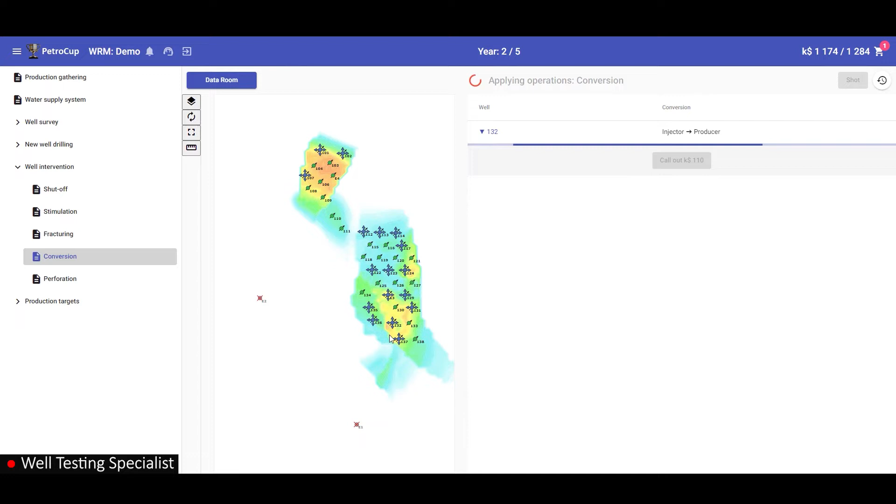132nd well, we shut off to 16-20 meters. I propose to drill wells in the south to the left of 137. It is necessary to place the well at the highest point on the structure and target the most reserves below. Geologist, do you want to drill in the northern part of the west? There should probably be a good amount of reserves in the northern part. I would like to get this information on where the reservoirs are highest.

Can you clarify? What other options are there? To the left of well 137, or where you mark the reserves, in the area around well 108, there will be more reserves in the area around well 108. Besides, if we explore them, it will be easier to maintain pressure. There could be two layers with residual reserves.

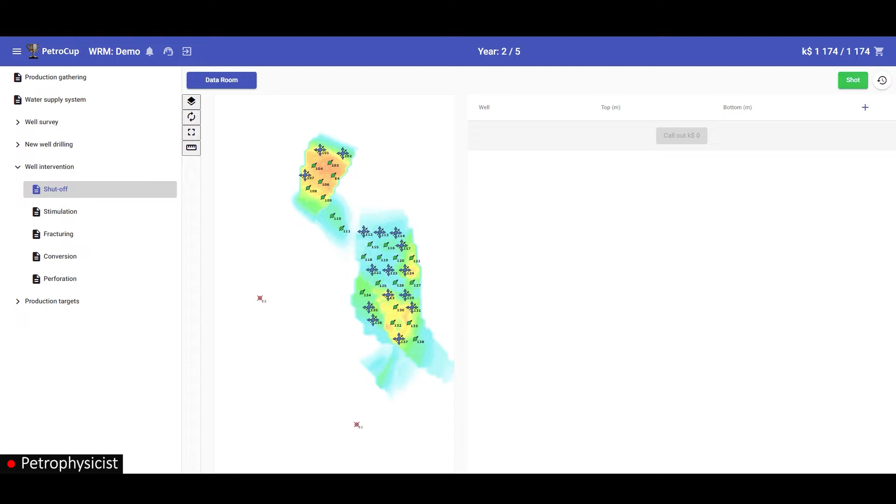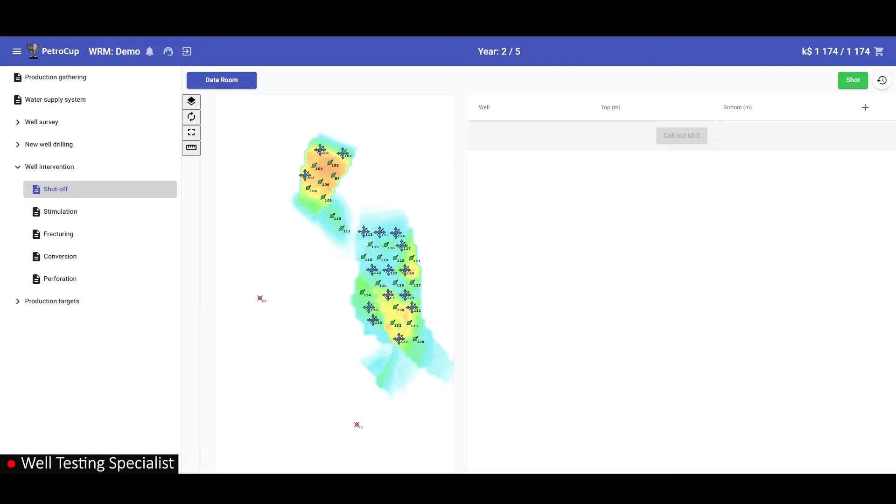Can we drill a new well and save $27 thousand for workovers? I support the idea proposed by the well testing specialist. We need to drill a well on the northern dome. The bottom hole pressure at well 109 is now 61 bars. Well 108 has been shut in again due to water cut. Therefore, it is possible to drill a vertical producer below wells 108 and 109. If it turns out to be a good producer, then next year we will convert it to injection and drill a horizontal well on the northern dome, if the budget allows.

I support this decision. And the remaining $27 thousand will be used for workovers. On the southern dome, we should only work over the most promising oil producers. Shouldn't we pay attention to maintaining reservoir pressure? This means conversions and tracking issues with channeling. We will have $27 thousand allocated for all the activities. Nonetheless, let's check the pressure, how effectively we have raised it through activities so far. What do you say?

We can measure the pressure in well 109 first, if we plan to drill a vertical well around those wells. Let's measure the reservoir pressure. Can you please state the well numbers? I have a question to the simulation engineer. I have a previous list of wells. Will we survey them all or selectively? During the second shot, do we have to set the production targets for all wells, or perhaps the information is clear for certain wells? I believe we shouldn't do it for all wells.

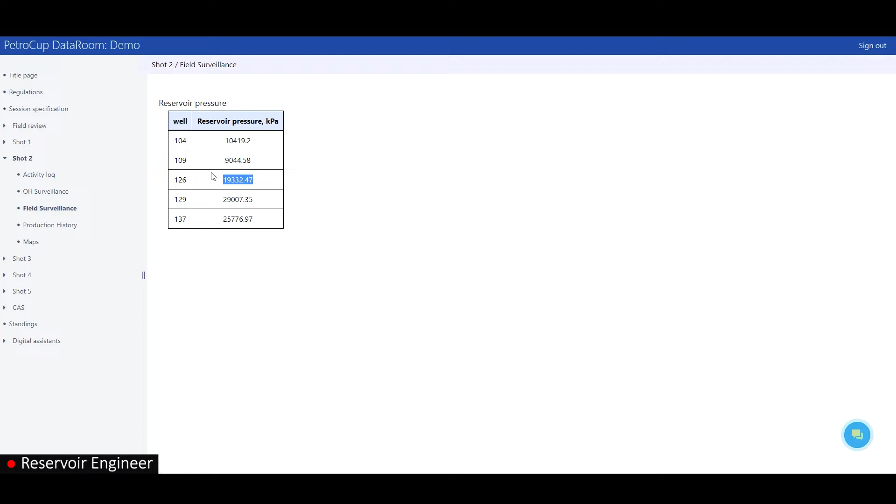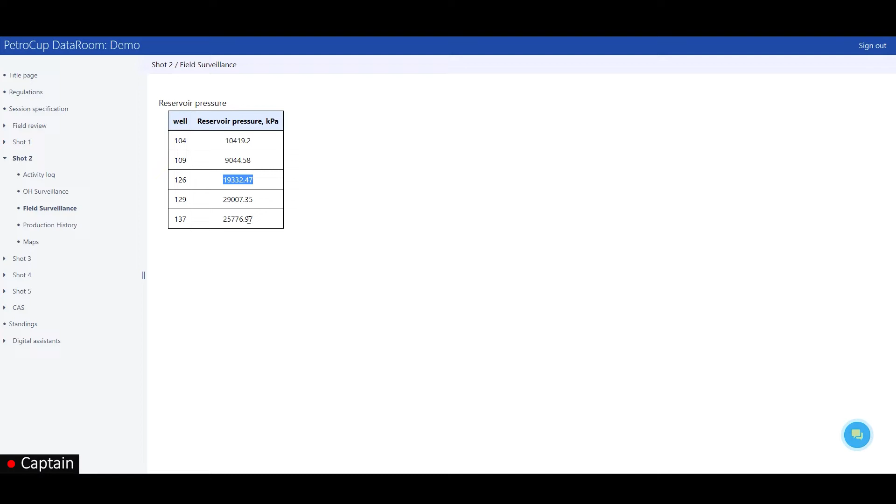In case of well 137, we shut off reservoir B1, and for well 129 too, which may imply that we are injecting too much. We can see this from the producer 126. Now we have started to inject a huge volume of water. The question is, is it worth stimulating this volume in offset wells?

We have previously over-injected into unit B11. Now we have removed the injection from there. Let's stimulate it, which is also not a bad thing. But maybe we would shut off the unit B11 altogether. Perhaps we should consider doing it later.

The last 3 wells, 126, 129 and 137, are located in the south. This is the target unit B2. And in the north, where we have not tackled yet, we have a problem with the formation pressure. Yes, we need to restore it. That's right. Can we convert well 108 to injection?

There, it is necessary to work on both well 107 and 108. And, if I am not mistaken, with 103 and 104 as well. For some reason, there is poor production and injection as well. If we convert well 108 to injection, it will help maintain the pressure at well 109 and any upcoming new wells. At well 108, it is necessary to perform water shutoffs.

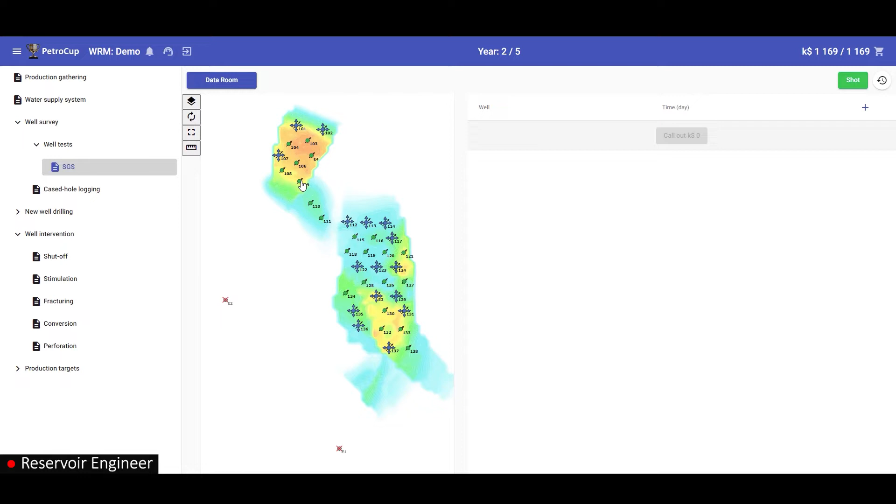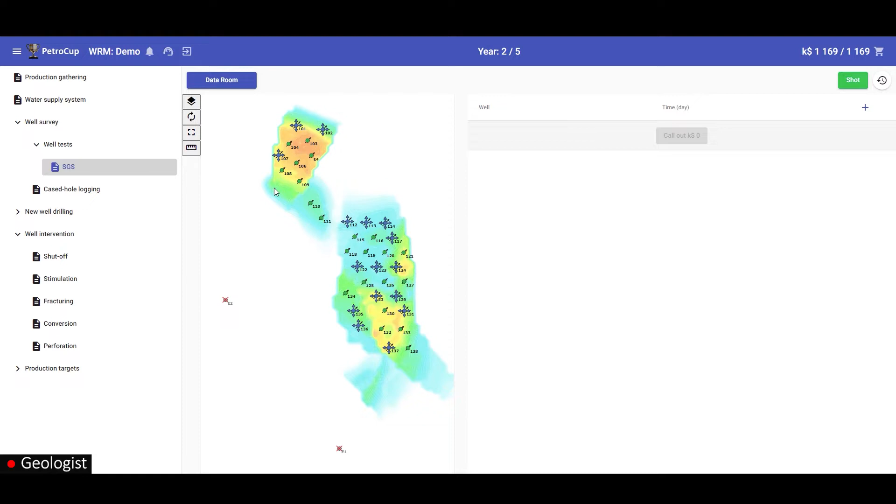Do we have a common agreement regarding drilling locations? Between 108 and 109 in the form of a triangle. I also support this point of view. If we are going to further convert it to pressure maintenance, then it's probably fine. At well 108, we probably need to shut off some water or gas zones and convert it to pressure maintenance to allow us to produce more from both well 109 and the new well.

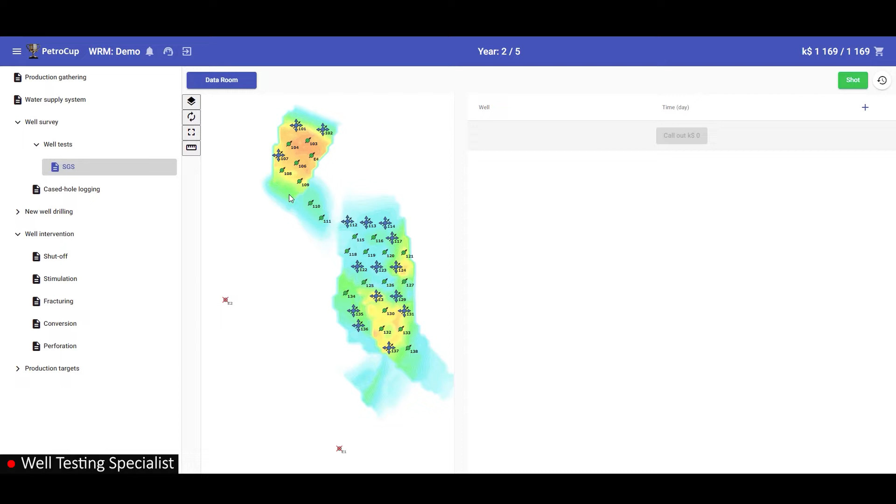Team Captain, what do you say? Please repeat it again. We're going to convert well 108 to pressure maintenance and perform water or gas shutoff on it. We will drill a new producer between wells 108 and 109 below. But first, get enough money, and on the next shot, if there are enough funds left, we will drill the formation below the zone proposed by the geologist, and then convert the new well to pressure maintenance. I think it is a good plan.

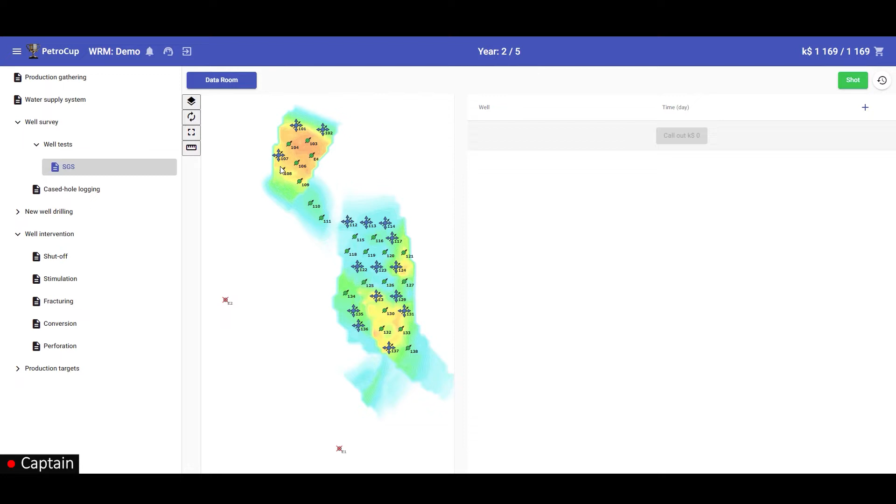Aren't we going to do anything with well 107? It hasn't been optimized yet, as far as I remember. We made a reservoir flow profile there. We are currently discussing drilling. There will not be enough pressure, so we need to see what to do next with wells 107 and 108. So we will apply remedial jobs to well 107, as we did with well 108.

All right, colleagues. Let's choose a data point. Which coordinates will be more preferable? Slightly to the left and above where the marker is located. Okay, geologist, how deep is the well going to be? Do we need all the reservoir units?

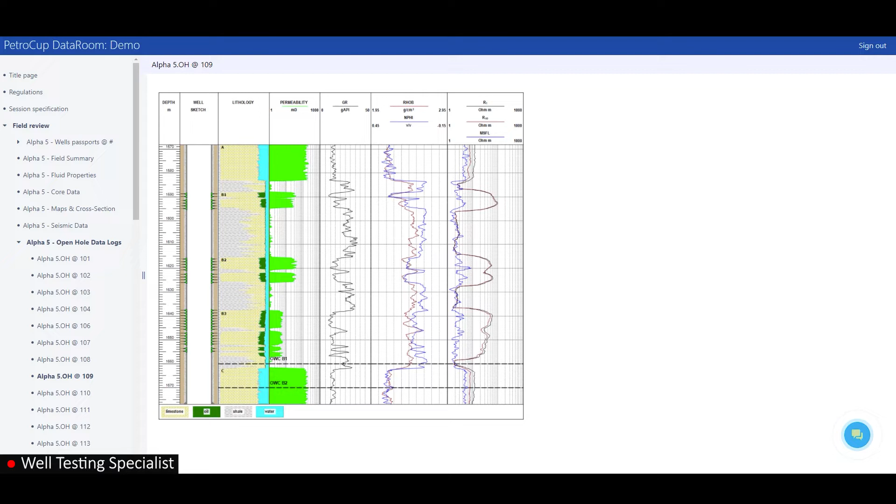We are developing a new zone, and we assume that in the future, the well will be an injector. So I think it's better to enter all 3 layers into the pay zone. We need to look at which reservoir zone is active in well 109. It operates on 3 layers. Then everything should enter the pay zone.

We can do it for 1680. This will cost 41 million. And hydraulic fracturing will cost around 7 million. Will we also perform hydraulic fracturing? Yes, it will have an impact at this field. Not at this field, but at this zone. But in my opinion, it is better to work with the old wells.

Yes, I also have a question. Which information are we going to rely on when drilling there? Based on a new interpretation of the seismic data which was given to us by the geologist, it is possible to question what he said. So let's look again. Petrophysicists, please offer your points.

Please open the seismics. The seismic profile shows that the trap is on line 150, and perhaps the trap is extending to overlying and underlying formations. Geologists, regarding line 109, on what basis will you have a justification? Geologist, we need your opinion about drilling a new well. It turns out that the layer should be located higher on line 150 than it was shown on the map.

Accordingly, for the lower layer, the map may be incorrect because there are no profiles in this area. It is absolutely wrong to drill a well to the left of 108 for the purpose of exploration. We don't need to explore, we need to drill a producer.

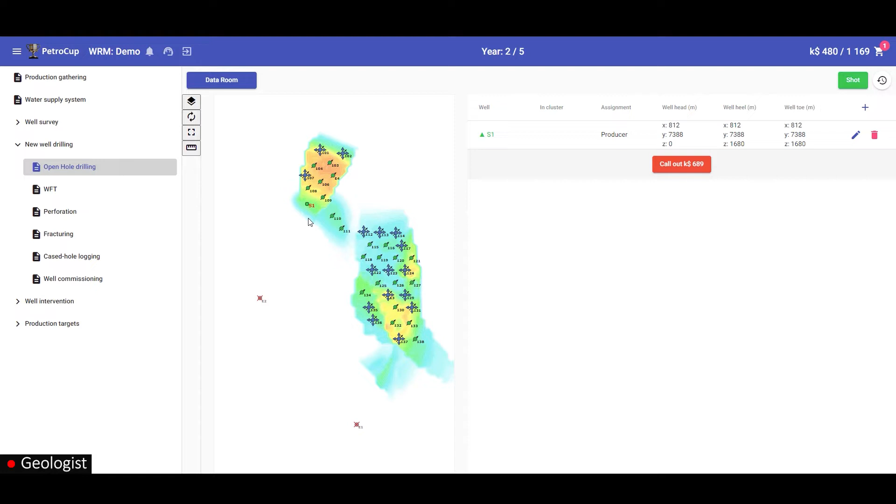There are more chances that there are reserves encountered below wells 108 and 109. Perhaps they will be located higher than this map shows. There are risks there. I didn't get any arguments, but perhaps the geologist is more experienced in this area. According to the current interpretation, there are reserves below 108 and 109. If we drill there, there should be no risks.

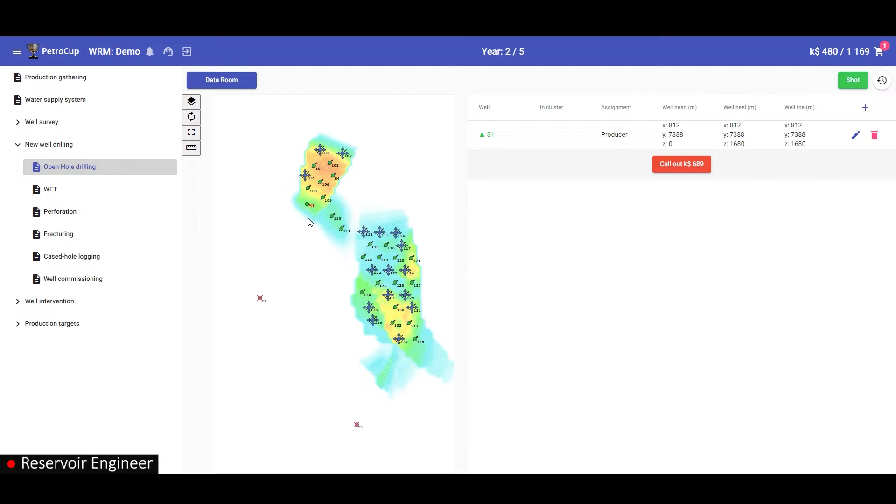As we are drilling now, we will understand what the saturation is and how the slope is descending in this direction. If everything is successful, we will see a good oil saturation and will be able to proceed further. If the saturation is bad, we will get water in a year, and we will convert the well to injection to restore the reservoir pressure. I am fully supporting the petrophysicist.

I will support the geologist because I understand what he wants to say regarding the fact that the interpretation of the markings of the structural map is incorrect, and the reservoir unit lies much higher. How do you know the structural map is wrong? There are no wells here, and you say that here is the flank of the geological structure.

Since there is not enough money, I suggest drilling where we know for sure that there is a trap, and not conducting exploration in order to convert it later to injection. It is true that we will maintain pressure at wells 108 and 109, but in any case do not drill for the purpose of exploration.

Presumably, our interpretation of seismic along line 150 is not correct. Accordingly, the mark to the left of wells 107 and 108 should be higher. There are reserves located below 108, even according to the current maps. So we have decided on the coordinates. We have not decided on whether we are drilling or not.

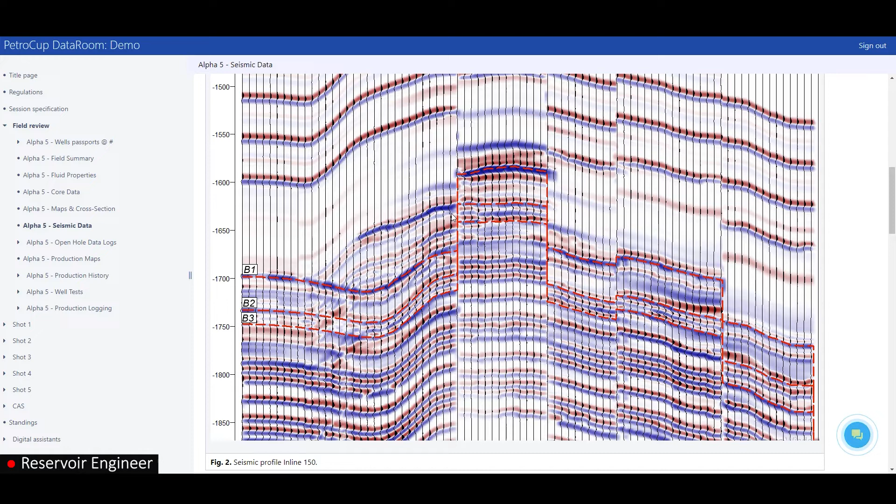Since we are debating, I would like to ask you, in your opinion, how much oil we will get from there? Obviously, there will be a low permeable layer, even at a maximum hydraulic fracturing value of 100 tons. If we apply remedial jobs to wells 103, 104, 109 and 106, we can increase production even higher. I really like this approach. Let's go without drilling. And by maintaining pressure, the oil production will be equalized.

On the northern dome, how many wells need workovers? Will the remaining 26 million be enough? I'm afraid not. We didn't even fix the channeling yet. Currently, we have identified water cut for wells 130, 133 and 134. I believe it was a bad idea to convert well 136. Perhaps we should work with injectors in the north and with producers in the south. And that will be for this shot.

We can increase the volume of the water production, but the question is, how much we will profit from this? We'll probably just receive water. So you want to finish up with the old wells now? I want us to sort things out with the main wells, solve the issues of shutting off the unit B1 in the south, so we will have a stable production. Only when we receive anhydrous oil and when the water cut drops 2 times from the current positions, then we can talk about drilling.

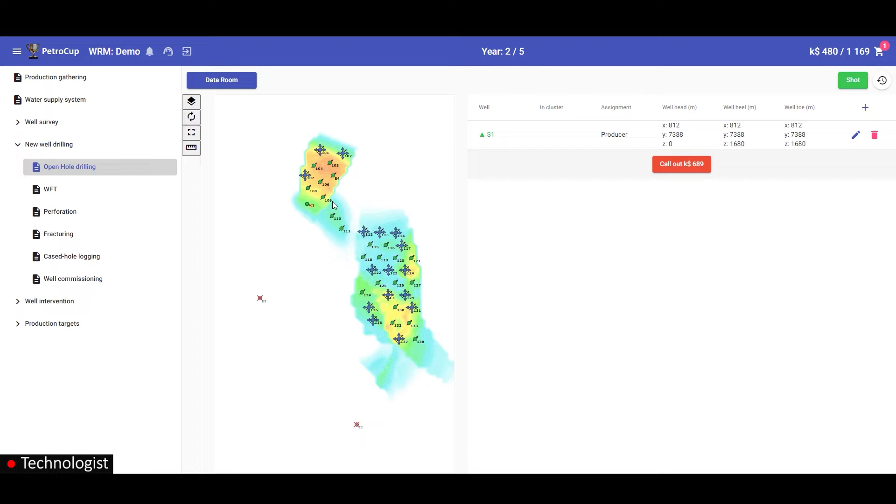But I like the strategy to increase reservoir pressure. We seem to have raised the pressure in the B2 formation to normal. Is it possible to slightly reduce the injection in the south and redirect it to the north? Colleagues, in my opinion, during the presentation there was a conversation that starting from the second shot, we will begin to shut off reservoir B1 and address it only towards the end of development. Have we changed our plans?

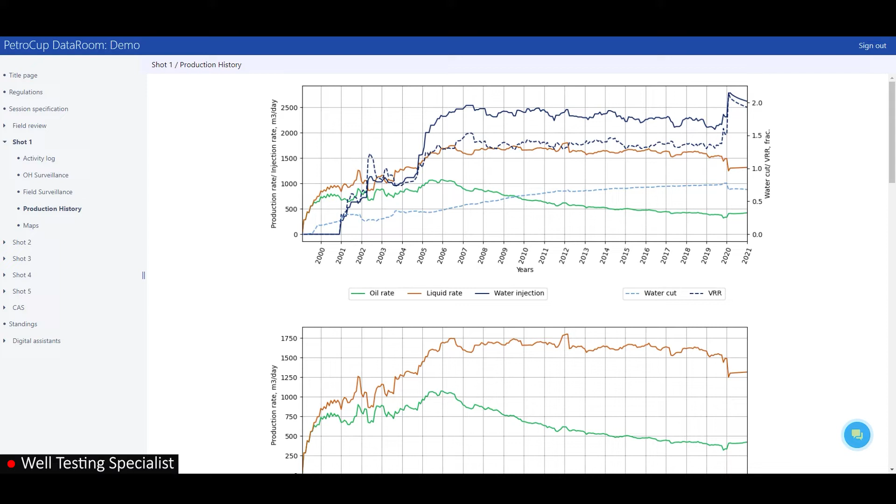I think we will perform even worse in the second shot. Please open the general schedule. This is not the point. The point is that we don't operate with the existing wells at all. We have invested 140 million on the main wells. Can you show me the schedule of the first year? All right, let's work with the main wells. What else have we missed?

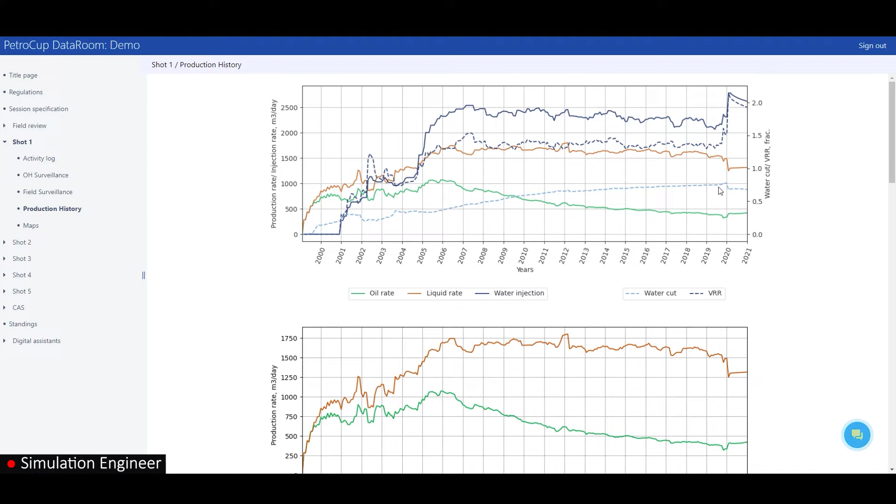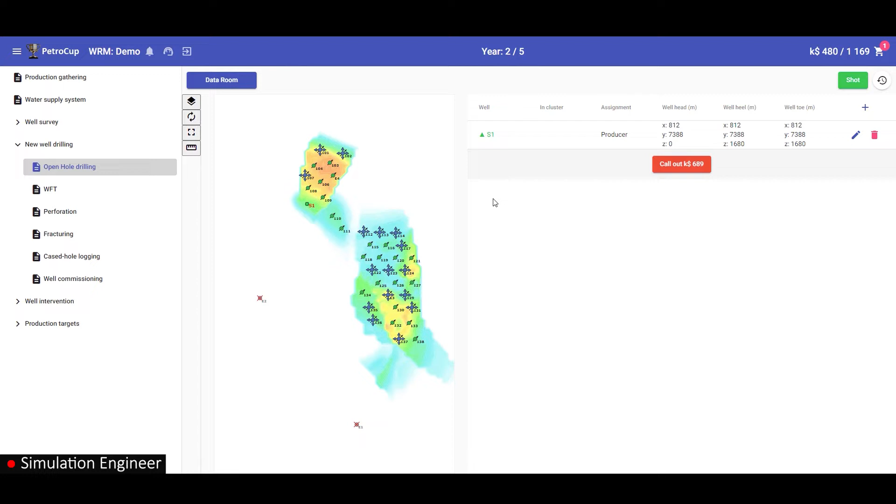Let's work in the north, because we haven't done anything there yet. Look at well 103. There is an evident channeling. Will we apply remedial jobs to them? What are we doing with wells that have auto-hydraulic fracturing? Water shut-offs? Do we completely shut off B1? Or what's the plan? Yes, let's do it. The petrophysicist can tell us the intervals for isolation work.

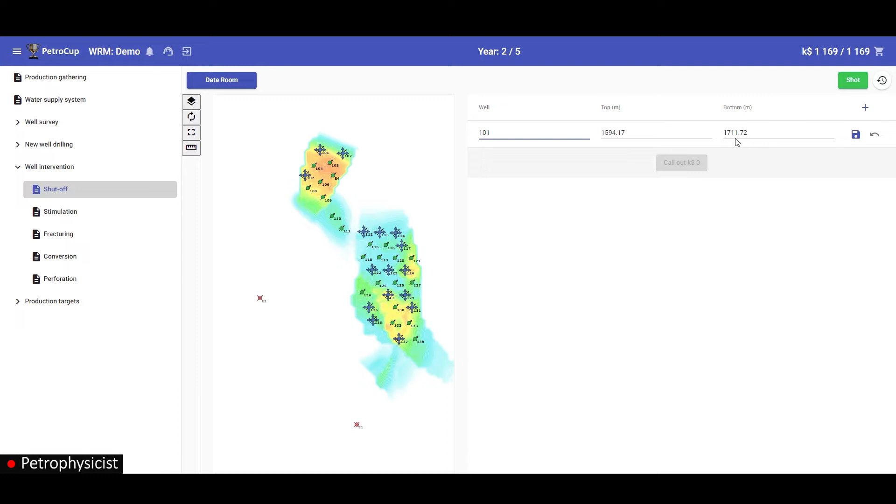Well 101, from the wellhead up to 1650. The behind casing circulation at well 101 goes only at the overlaying formation. What about the underlying formations? Production logging wasn't performed here, but there is for 102.

I also propose well 102 from the wellhead down to 1650. Look, we have reservoir flow profile for well 102. The entire injection goes to aquifer A and C. I suggest shutting off overlying and underlying formations. Will the price stay the same? It will be cheaper. 2 water gas shut-offs and 1 round-trip operation.

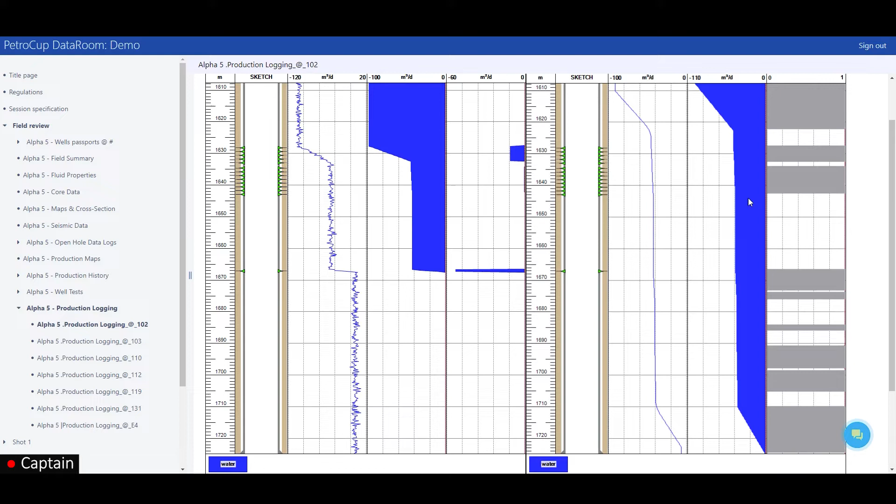Here, it is clearly necessary to isolate the underlying formation. What do you say? Yes, everything is correct, and we hope that the auto-hydraulic fracturing will also be eliminated. I asked the petrophysicist to provide me with the relevant depths. From the wellhead up to 1660 and from 1680 to the bottom hole.

Next is well 103. How are we going to isolate it? The calculation of the economist showed that shutting reservoir B1 is proven to be effective. Or we can perform what we did with well 138. Do you recall what result did we get for it? We have only shut off B1. It is clear from the pressure history that B1 does not work. Then we leave B1 too, as is? Then we will isolate it up to 1602. So only well E4 remains.

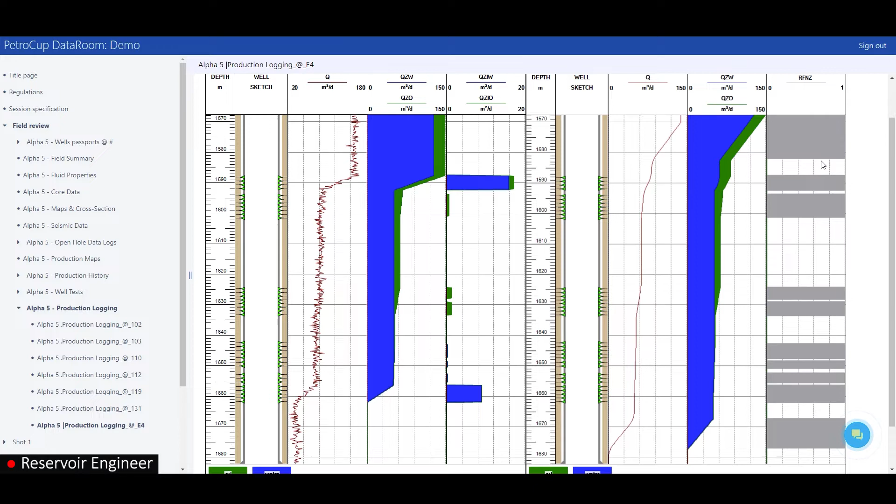Here we also need to perform water-gas shutoffs from overlying and underlying formations. I propose to close aquifer A, B1, B3 because there is water saturation, and aquifer C. Well number 107 also needs remedial jobs. The reservoir flow profile was performed during the first shot. Then here too we shut off overlying and underlying formations as well as reservoir B1.

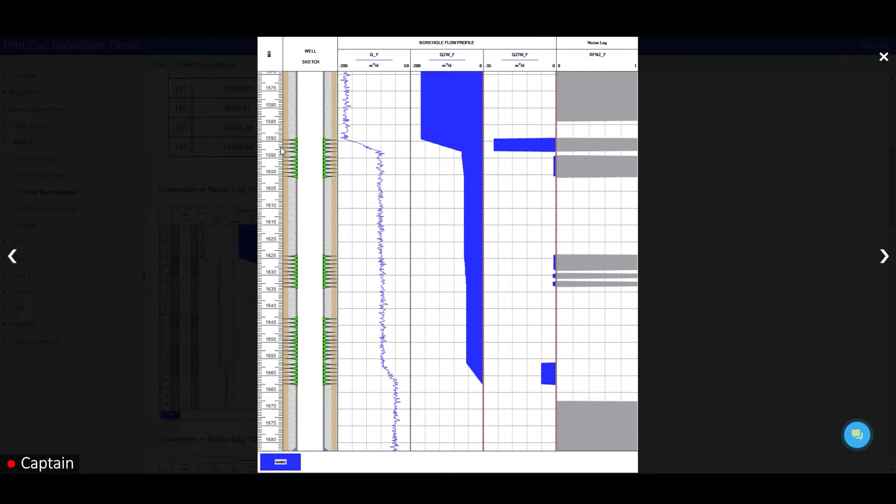Then well 107 from the wellhead up to 1595 and from 1663 to the bottom hole. Do we have any questions about the operation of wells 106, 109? There is another well, number 108, and there is a reservoir flow profile for it. Let's try to perform water-gas shutoffs of the aquifer and reservoir B1 so that it operates at production for 1 year, and then we will decide.

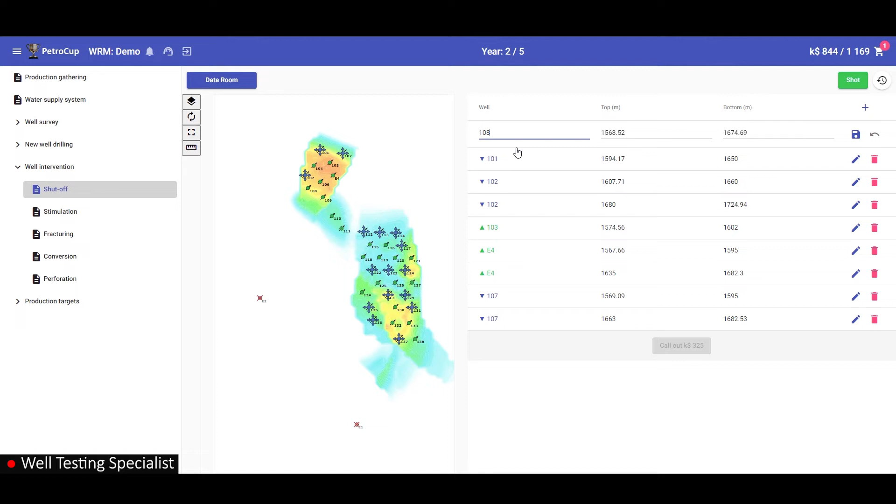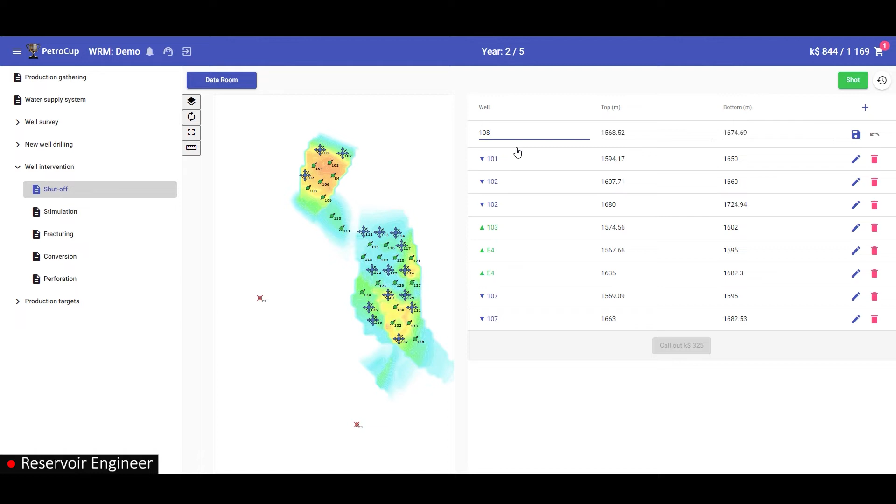At well 109, we have measured the pressure and it was 90 bar. Aren't we going to convert well 108 into injection? Let's convert it. The main production comes from wells 103, 104, 106, and E4. Yes, I believe this is the right decision. Moreover, it seems to have insignificant production. It is possible that there will be a low water cut, but it can be sacrificed at the expense of 4 wells to acquire pressure.

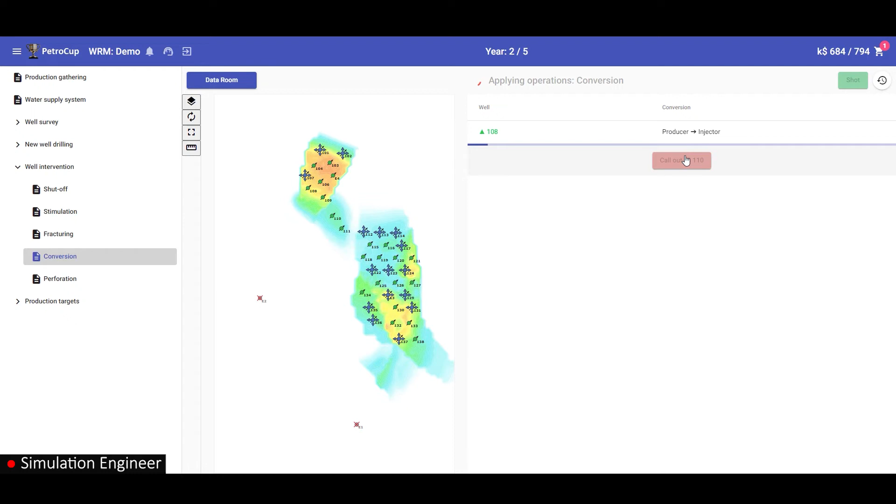Let's shut off the unit B1 and move on. Well 108 from the wellhead up to 1595. Next, let's do the conversion. And we should immediately perform stimulation to well 104. Well testing specialist, please state the wells that are clogged, but where can we get an oil inflow? From the producers, well 104 with a wellbore skin of 14.5, 103, 4.3, 130 with a wellbore skin of 17, 132 with a skin of 11, 134 with a skin of 20, and 138 with a skin of 20.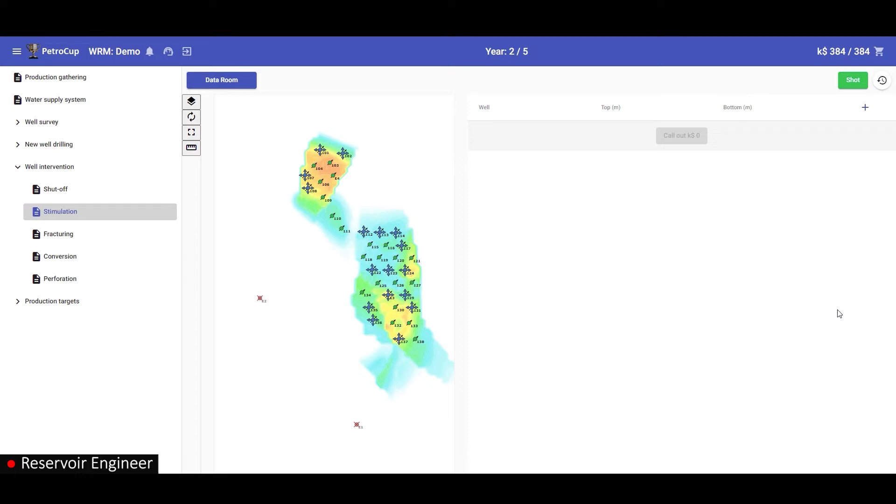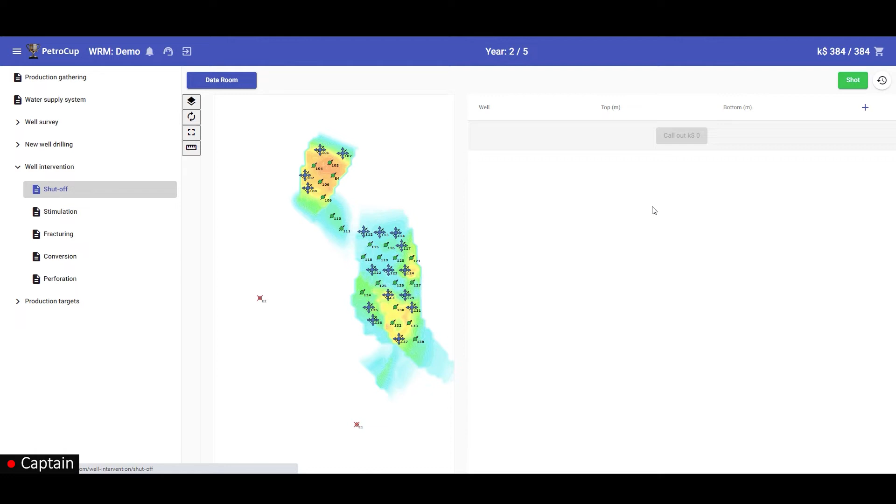Okay, I am calling the activities. What other areas do we suspect of crossflows? Let's finish adding the perforation. There is a good pressure there already. Technically, we have almost finished adding the perforation everywhere we have to. Let's shut off reservoir B1. According to the pressure of wells 106, 109, 107, it is evident that we inject a lot more than we produce. This means that it is possible to stimulate production. So, only water shutoffs need to be done.

We have shut off well 112. Well 113 is not shut off, and well 114 is shut off. Let's shut off well 113. So, to clarify, we are shutting off reservoir B1, we perforate reservoir B2. At well 114, we did a water shutoff and perforated unit B2. Well 115, water-gas shutoffs of B1 from the wellhead up to 1640. Well 116, shut off from the wellhead up to 1645.

117 is complete. 118, water-gas shutoffs of reservoir B1 from the wellhead up to 1635. Well 119, water-gas shutoffs from the wellhead up to 1630. Well 120, there was no water-gas shutoff. Let's perform it from the wellhead to 1635. Reservoir B2 entered the pay zone. 121, reservoir B2 already entered the pay zone. Reservoir B1 has not been isolated. We need to perform it from the wellhead up to 1635.

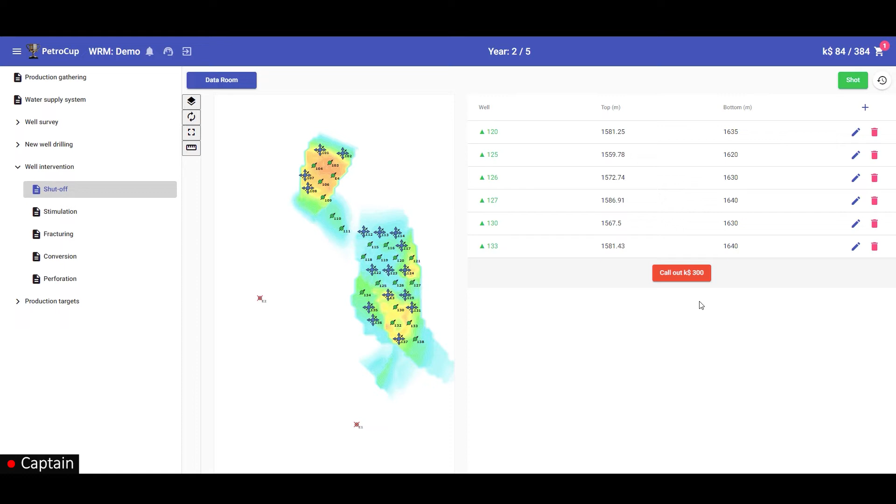Can you state the intervals? Well 120 from the wellhead up to 1635, 125 up to 1620, 126 up to 1630, 127 up to 1640, 130 up to 1630, 133 up to 1640. Let's make a call. So as I understand, we have put our main focus on reservoir B2. That's right. There are several more wells that are injecting into B1. All right, I am making a call.

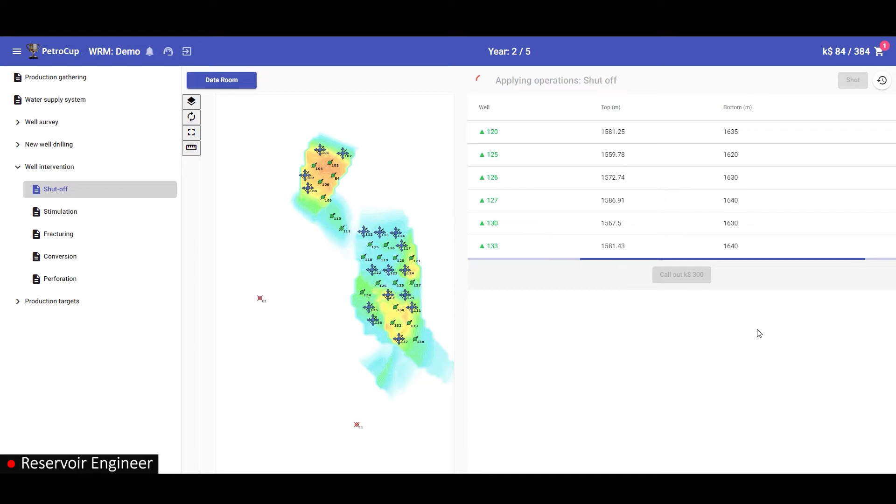We have a bit of money left, which we can spend on logging reservoir pressure. Or we can perform reservoir flow profile at the injector so that we can perform water gas shutoffs during the third shot. Can we apply stimulation or perforation? There's not enough money left for stimulation. And we have finished adding the perforations wherever possible regarding reservoir B3 in the north. Should we do that? I suggest well 104, or perhaps well 103, or 106. Can you suggest which one is the most promising?

I'm voting for 106. There's a large water cut at 103, which may be shut off at the next shot. Wells 104 and 106 are both good candidates. That's why well 106 is better. Okay, please provide me with the intervals. And since 103 was isolated, maybe there is no sense to do it now. When the water cut falls, then we can use another one. Where is the highest reservoir thickness? I do not vouch for the interpretation of open hole data.

How are we certain that in the interval of 106 it is oil and not water? It is definitely oil. You see, the water would have a much lower resistivity. Still, let's perforate one well after all, and that will be it. The depths are from 1644 to 1648. Done. Next, the production targets. Since we have almost shut off reservoir B1 everywhere, the minimum downhole pressure is 45 bars.

I'm in favor of leaving 101 and 102 at the same production targets. I support them, because they will now target the injection into the reservoir. Let's increase the value of well 107 to 200, or we can let it be. And there are no more risks of channeling there. You can put 200. We have converted well 108, so you can put 200 there. 112, 140 is possible. 113, 200. 114, 200. 117, 200. Let's leave 122, 200.

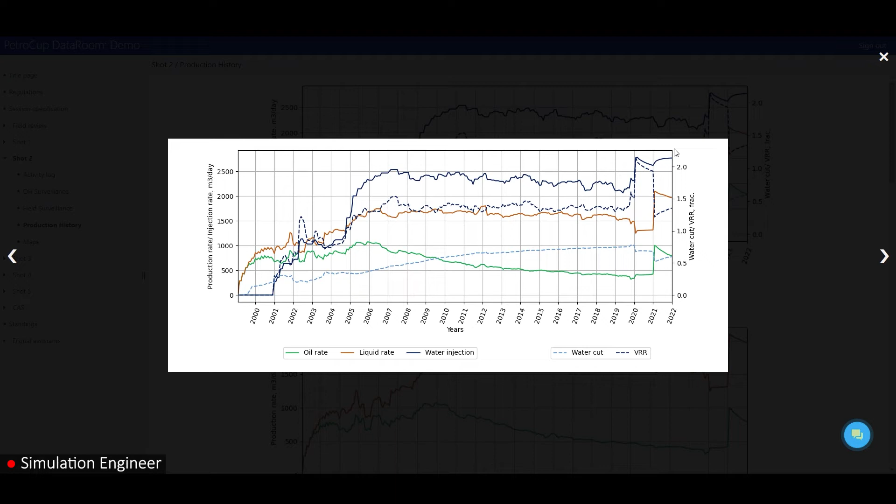And what is very important, our scenario to close the water cut high-permeable sublayer gave fruitful results. And we were able to significantly reduce the water cut. Yes, that is. The average water cut has already decreased from 80% to 60%. Yes, this is very good. I think that it is possible to see the results for each well. Regarding well 101, the remedial jobs were applied after the auto-hydraulic fracturing. I think that we can add a little more here. What do you say? Or should we be concerned about breakthroughs? Let's wait and see.

For now, the well 103 has been shut in. Technically, on the one hand, the well is located inside the dome. And on the other hand, it is unclear how wells 101 and 102 operate. Based on proposals, it is possible to convert this well to injection.

That is, to conduct a production logging and then convert it to injection and try to build around this well, taking it as a reference in order to increase production at wells 104 and 106. That is, it is a potential candidate to be converted into an injector. This is one of the options. I suggest that we first consider all the wells.

Just looking ahead, I will say that the well 104 was also flooded. I believe we do not apply remedial jobs to them. As I believe, there were remedial jobs applied to well 103. There were workovers on wells 104 and 103. So it didn't work out.

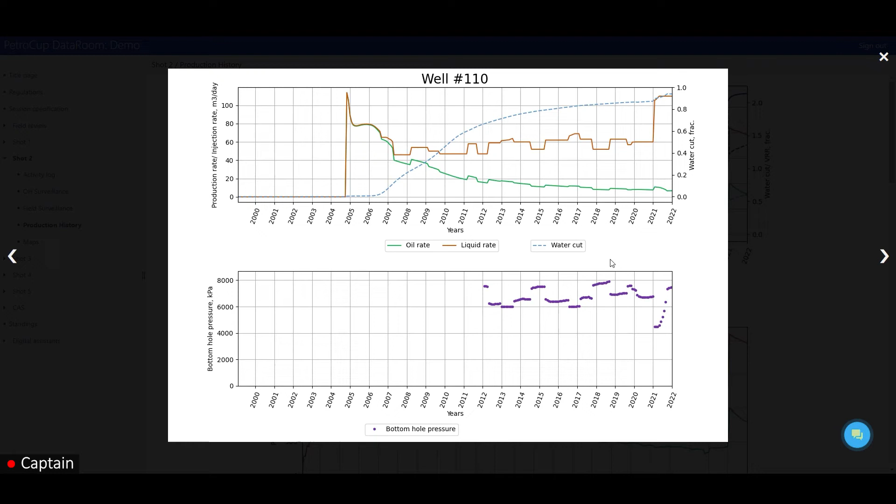I see a connection based on the increasing downhole pressure, although we do not have a water flood in the area around wells 110 and 111. This may be due to a water cut. So this is the water from the same well. Because when the water quantity rises, the amount of water flow increases, along with the mobility in the general system.

The water cut increased slightly. I do understand this situation when the water cut was, figuratively speaking, about 0 and then it became 80. And here we have a relatively insignificant increase from where it was initially. In other words, there was a slight increase in bottom hole pressure.

Well, yes. Show me real examples of wells where you could observe such a situation, such that a 10% increase in water cut would increase the downhole pressure by 20 bar. So it's definitely not channeling, right? That's right. Let's proceed further.

112 was converted to the pressure maintenance. It seems to be working at the maximum potential. Is it possible to reduce a little? What do you think? Yes, it does. Are you referring to well 113? The situation is normal here. The same goes for well 114. And regarding well 112, we can reduce the flow rate.

And there is a small growth at well 115. We have not shut off the upper subunit there. This is why we had water cut. Let's shut it off and perform water shutoff on B1. The same goes for well 116. So after all, our strategy that involves shutting off reservoir B1 was correct. Now we will go through all wells that have been shut off, and we will be able to see better.

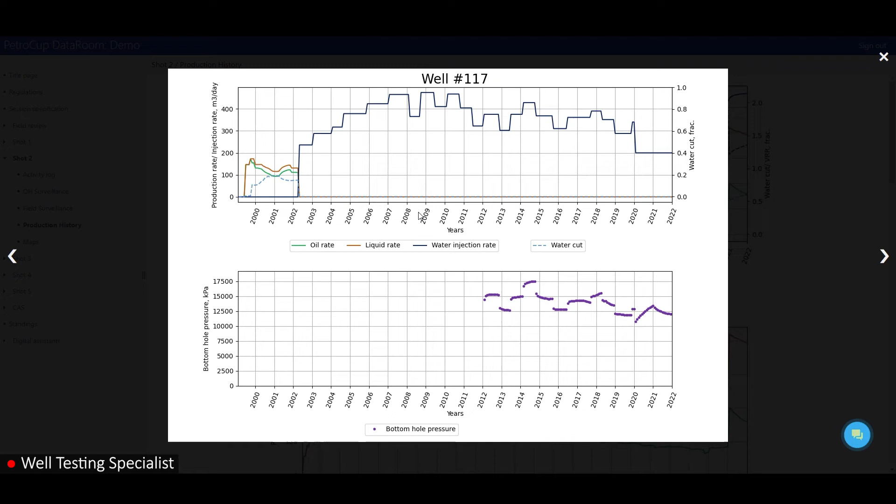Let's proceed. It feels like this production is natural for this well. So when we reduced the injection volume, the bottom hole pressure dropped. If we leave an extra 100 cubic meters of injection, we can use them when well 117 declines even further. We need to order production logging.

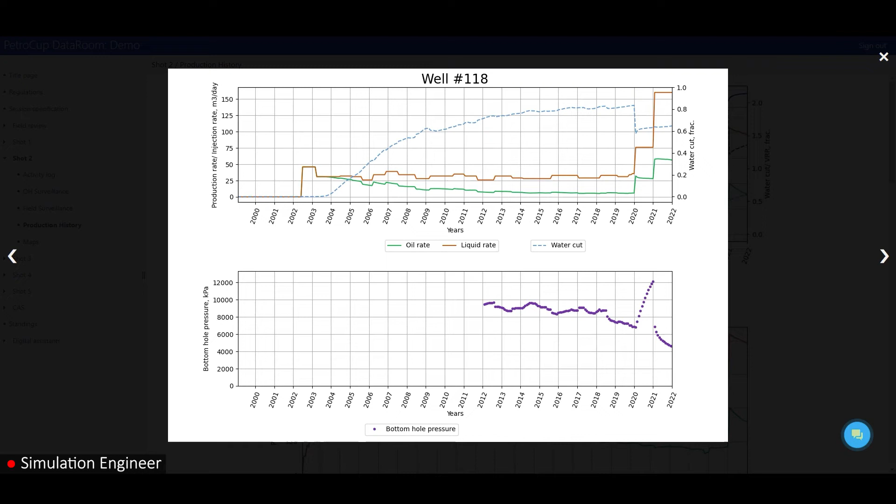Yes, as there was no effect from water gas shutoffs. Production logging at well 117. Well 118 is operating at maximum potential. Is the pressure insufficient? And we haven't shut it off either. There was no time for well 118, but nevertheless it provided a good increase.

The same situation for well 119 and 120. Look, we have shut it off, the water cut has fallen to zero. Now we have 40 cubic meters of pure oil. Is it necessary to increase the pressure at B2? There is also not enough pressure at well 121. As a matter of fact, there is not enough pressure in this entire area.

Well 124 has a good injection. 125, there is not enough pressure, but it's still good. The water cut is zero. 70 cubic meters of pure oil. The same situation for well 126. We can increase it slightly at well 126. The water cut has already started. Where is it coming from? When injecting, the water begins to reach producers.

At well 127 we have reduced the water cut. The pressure is just a bit from being enough. And should we reduce it a bit at well 129? Yes, it does. Well 130, there is not enough pressure, but we can optimize it. And we have closed off, but at the same time, the inflow has been minimized. It's likely that wells 135 and 136 have an influence here. It appears that these wells draw a huge volume of water there. But this is another topic.

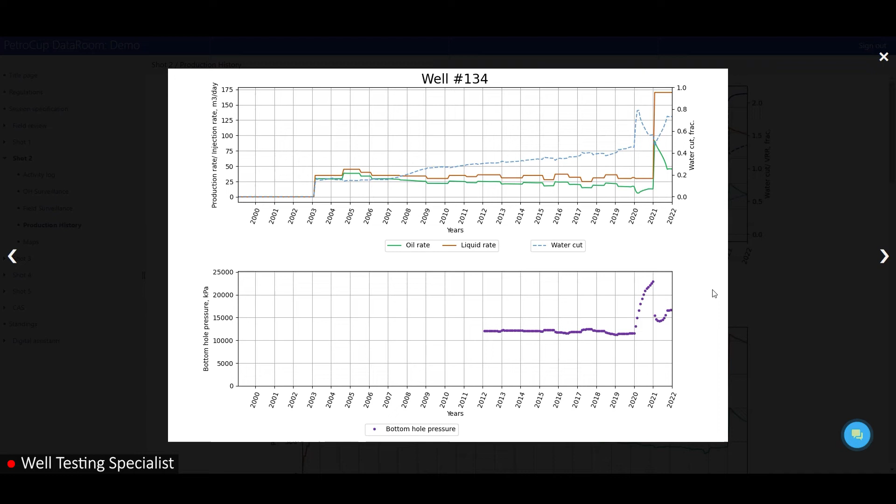We have increased the liquid rate there by 5 times. Yes, because there was an optimization. It's just possible that we encountered water cut. If we perform production logging, everything will be clear. This well is still working and was not yet killed. We will correct the situation. We are going to lower it a little at 135. I think so, yes. At least up to 250 cubic meters per day. Then maybe there will be no breakthroughs.

At well 136 we reduced it a little bit, and for well 137 too. It seems to me that we can leave it as it is. We have already reduced it, and it operates normally. The pressure is not at the limit. The injectivity is good. I think that we inject too much. How efficient is this well? What about the reservoir properties of the well? If we picked up the entire unit B2, then the thickness there is 12 meters. The permeability is 30 mD. According to the analytical model, the value should be 90 mD.

Why is the water injection rate of this well so small? Do you think there is no wellbore skin here? The permeability is low and unit B2 is in operation. Of course, we reduce the injection. Maybe we should perform hydraulic fracturing? I don't think that it's necessary. We can make an auto hydraulic fracturing by increasing it to 150. Can you explain why we need to perform auto hydraulic fracturing?

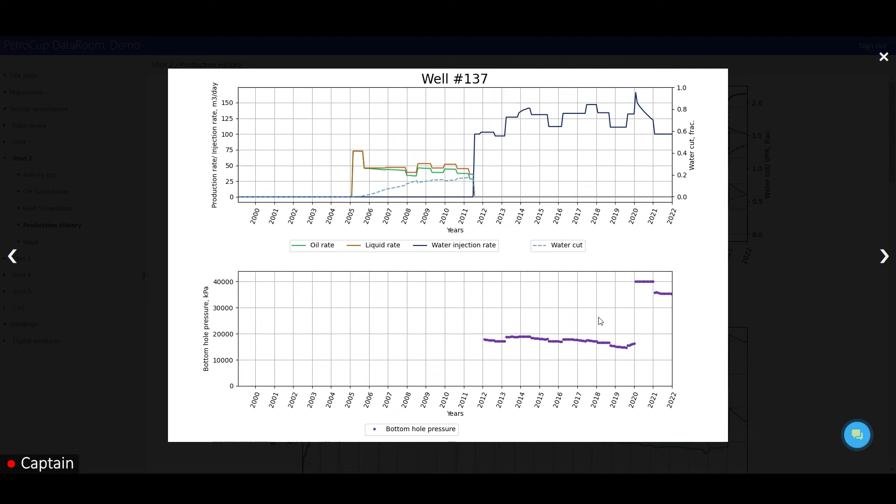Auto hydraulic fracturing will not happen here. The well withstood the maximum pressure that we created. The well is in operation. No hydraulic fracturing is needed. Current production target is more than enough. Well 138 has a good increase. It is operating at the limit. However, the pressure is insufficient.

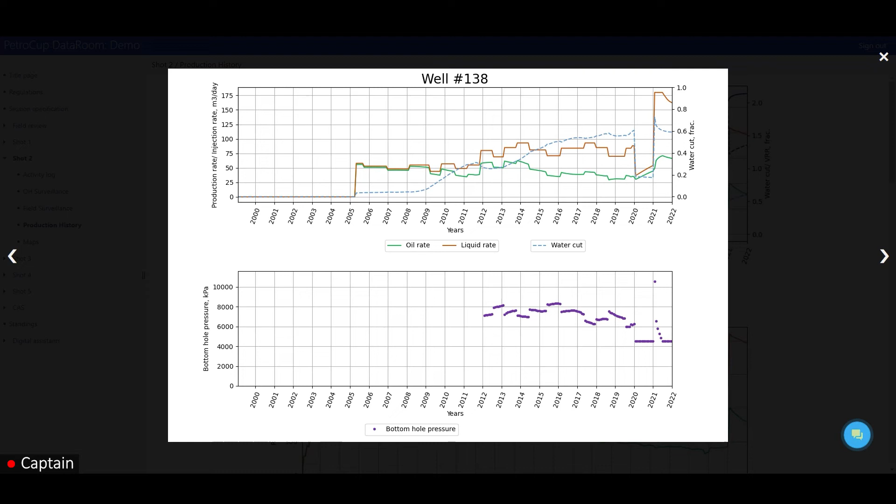Yes, but we can, however, shut off the first unit here. It's fine, your idea worked. Technically, the acid stimulation was successful. Not to say that it is 100% effective, but it works. The well is located on the flank. If required, B1 can be shut off altogether. Let's leave it as it is.

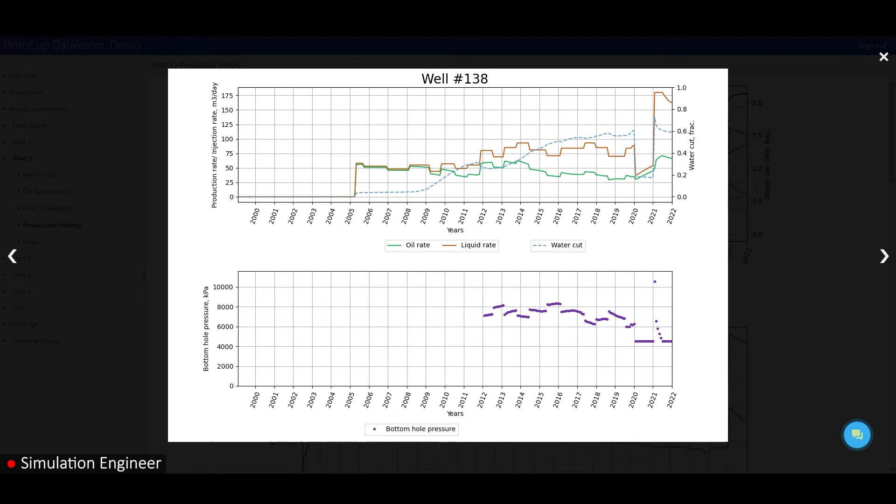But how much reserve volume will we lose? If there was a high water cut, it would make sense to shut it off. But there is only 60%. I think we will make it to shot 5. No problem. We just produce a lot of water. I am in favor of not extracting excess water. And what do you think about drilling an injector in the south? Does it make sense? Let's finish reviewing first.

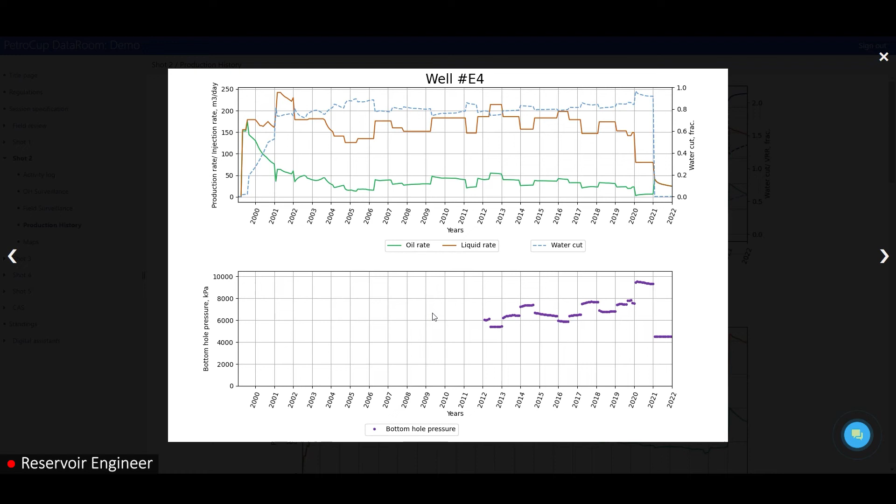E3, we reduce it a little. E4, like the well 103, water cut has decreased. It seems to me that at both wells 103 and E4, it is necessary to make a reservoir flow profile, and then determine which one should be converted to production, and which one is injection. We require production logging for the well E4.

According to the activity list, 5 wells were identified for production logging. Those are wells 117, E3, E4, 134, 103. Let's start with them and review our further strategy based on the results. Before we start doing anything, we have 125 million at our disposal. What is our plan? Drilling 2 producer wells, 1 vertical injector, and 1 horizontal producer.

Based on the result, let's focus on pressure maintenance. Overall, we have acquired good results even without drilling the producers. So if we are going to drill, it is going to be injectors that will increase the reservoir pressure. We will now convert wells 103 and E4. I believe that it will be enough to just convert these wells.

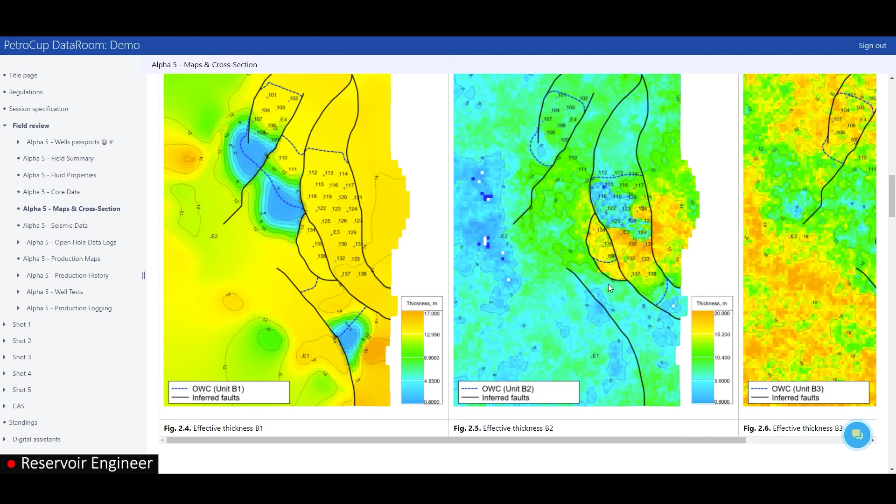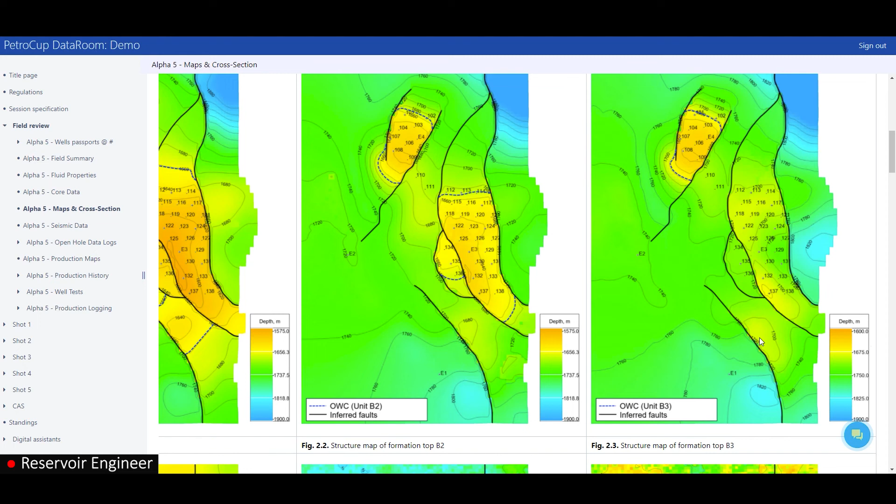Let's also take a look at the seismic data. According to the seismic profile of well 243, the formation top of the reservoir B3 is located at 1,690 meters. It is necessary to drill with a headroom of about 1,710. There was water in reservoir B3. There is no point to drill so deep. Okay, what about reservoir B2? At B2, it is also quite low.

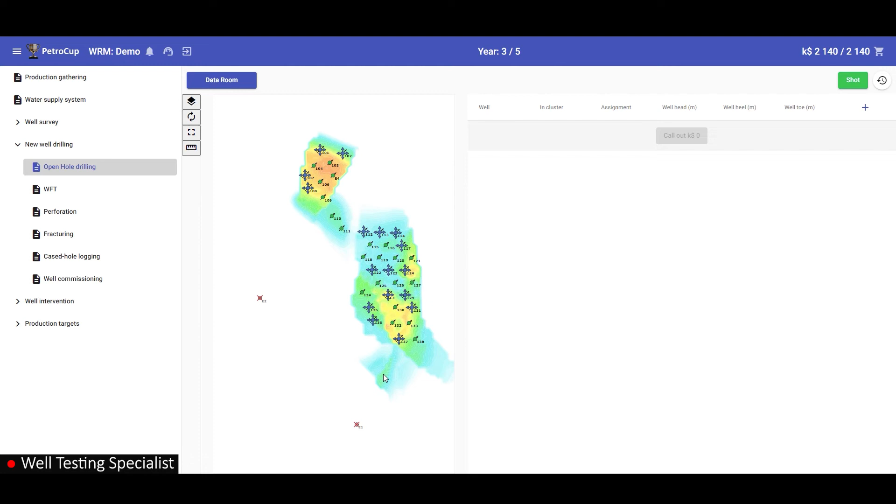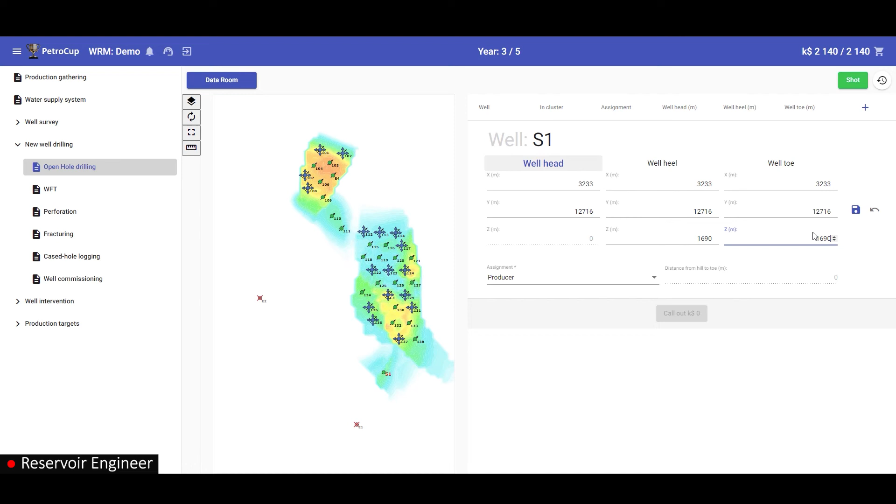We need to mark it somehow. Probably we will drill up to 1,690 meters. Yes, you can even make it lower. Let's drill then. The coordinates are 54, 90. Geologists, do you approve? Yes, I approve. And I believe that if these sublayers are up to standard, we can achieve higher reservoir coverage through hydraulic fracturing. We are beginning to drill now.

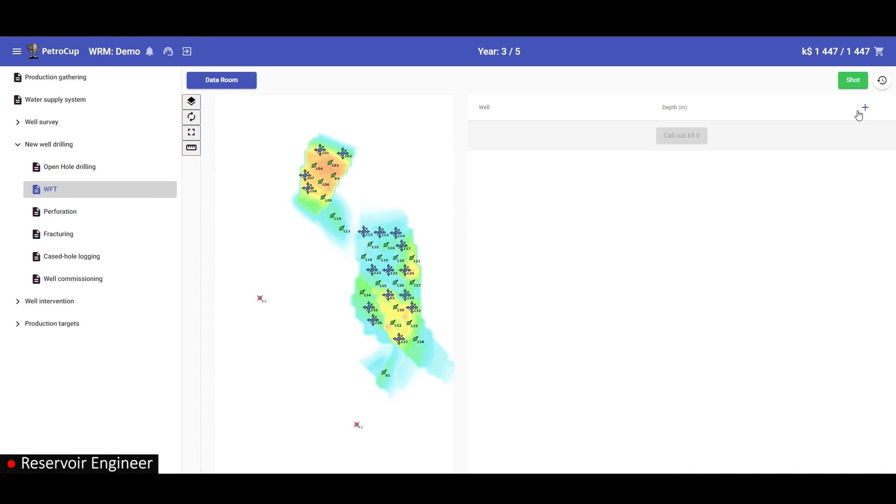Let's now look through the results of the open hole data. We are a little short from reaching reservoir B2, but it's still identified to be water-bearing. The barrier is rather small. I propose to perform wireline formation testing both on the aquifer and target reservoirs. After that, we have to make hydraulic fracturing on the bottom part of the target zone in order to cover this zone and produce at low differential pressure, data points 1620 and

1646. Layer A has a very high pressure. Surprisingly high, even higher than hydrostatic pressure. At the reservoir B1, it is slightly higher than expected level. Technologist, please bear in mind that the pressure there is 20 bar higher. I propose to make perforations 1636 to 1651 meters. What will the petrophysicists say about this?

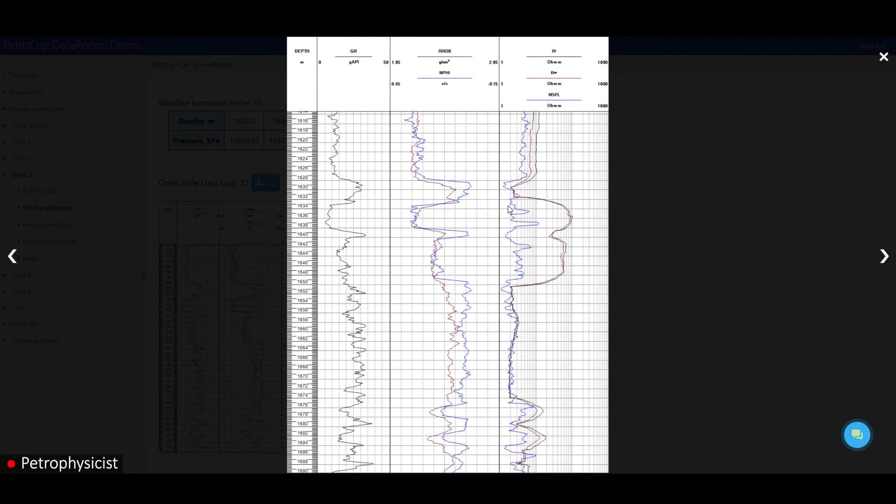Maybe we will perform hydraulic fracturing on the formation at 1650 meters. The overlaying formation has a pressure of 171 bar and 3 meter barrier. I asked the technologist to calculate the minimum downhole pressure that will allow us to avoid the channeling. So we know the injection, bottom hole pressure and reservoir pressure. What will be the resulting flow rate? This is a question to the simulation engineer.

I propose to step back from the barrier. Let's not make it 3 meters, but rather 5 or 6. Then we can create a big drawdown. Another solution is to inject 1643 to 1652 meters. Perform hydraulic fracturing.

Make B1 enter pay zone and then produce at these conditions, and we have a better chance of channeling not occurring. Then we make a perforation and hydraulic fracturing at data point 1646. We are putting the well into operation. We are drilling the second well.

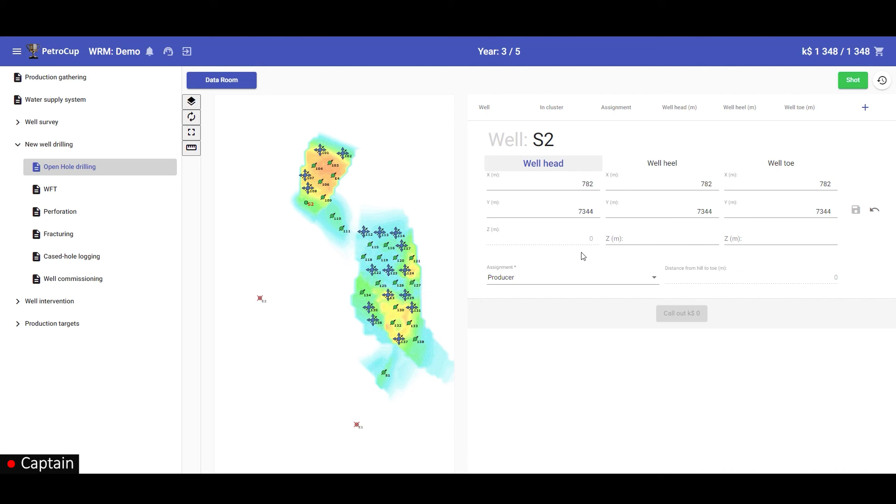I ask a geologist to join the discussion and state the coordinates and depths in the northern section. Below well 108 and 109, in the green zone, the coordinates are 31 and 36. Can you open the open-hole log data for wells 108 and 109? Are we going to inject into reservoir B3? We can. The depth is 1670. We can make some headroom and make it 60-80. Okay, let's wait for the calculations to finish.

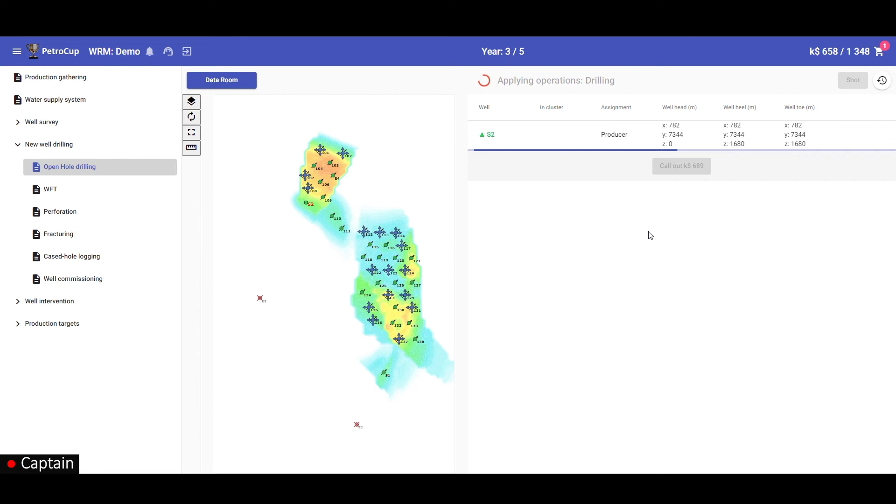Are we going to perform wireline formation testing? Yes, we should perform it. Open hole data of the new well. I would like to ask petrophysicist to evaluate the results. Reservoir B1 is clogged and has poor reservoir properties. What are your recommendations regarding perforations? 1620. Hydraulic fracturing. We must first perform hydrodynamic logging.

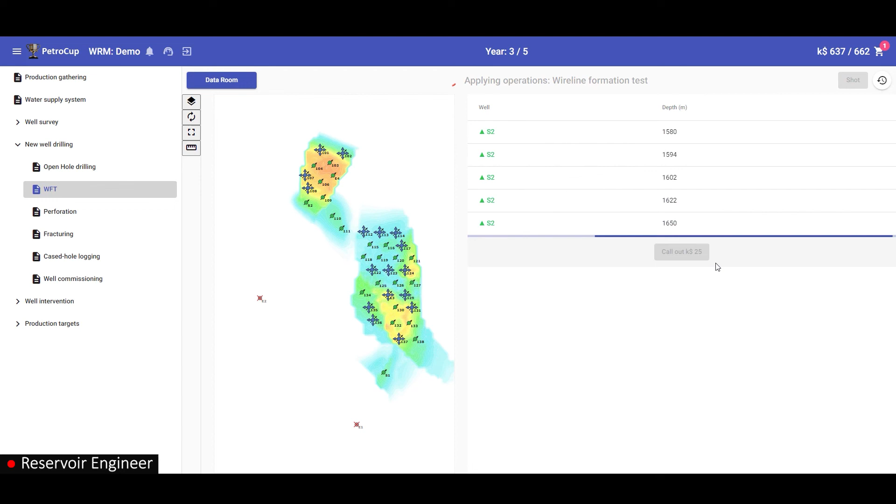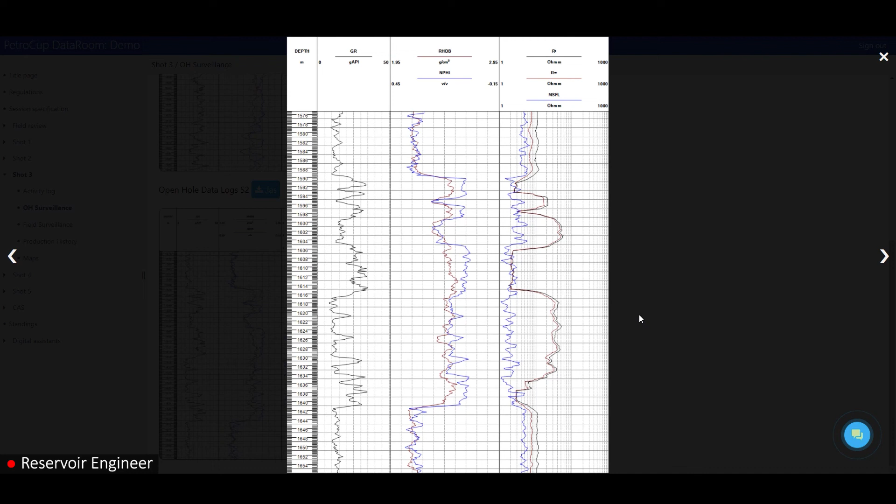Now let's perform the perforation. The previous values were 1598, 1604. Petrophysicist, please tell me the values for B2. Is it 1616, 1630? Yes, that's right. That's it. We entered the values. Will we perform hydraulic fracturing? Yes, at a depth of 1624. Then, I suggest that we still perform a reservoir flow profile and see what inflow we are going to get. Yes, let's do it.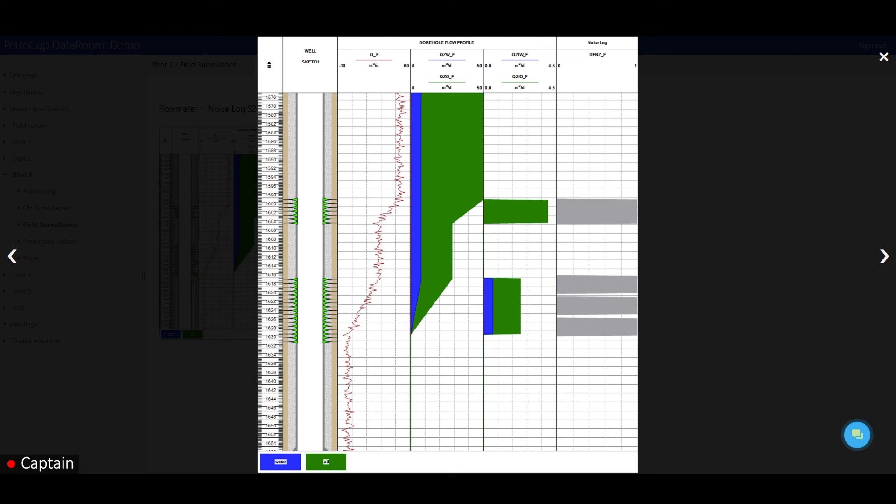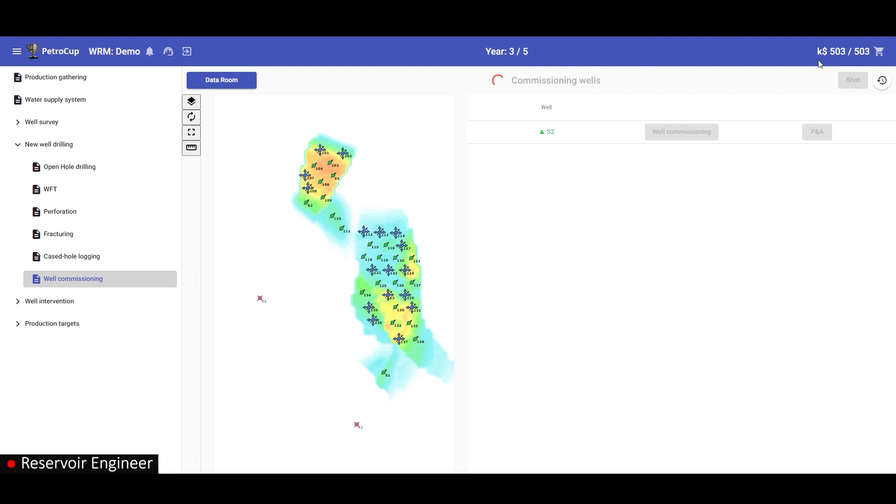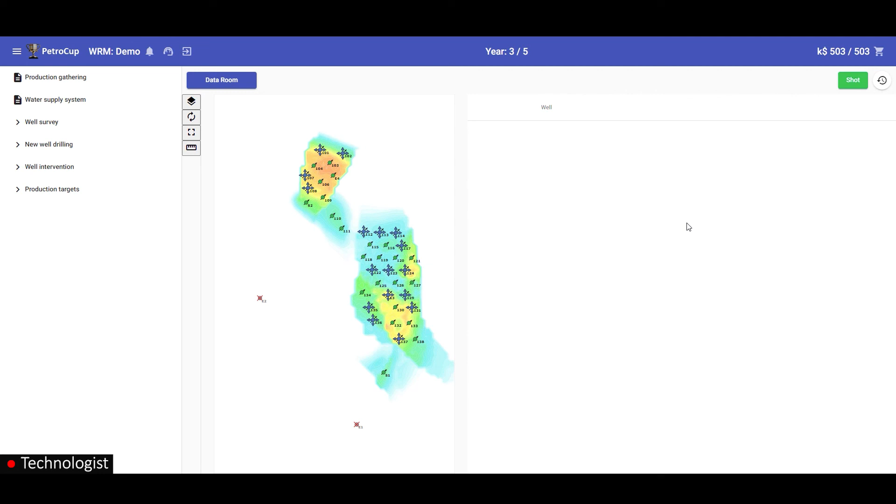The reservoir flow profile was not informative, we just looked at the cross flows and the pressure difference. I suggest we perform reservoir flow profile at all wells that are currently in operation. We have performed reservoir flow profile, and now we know the inflow of reservoir B2. The well is in operation. When we get the total inflow, we will understand what is happening with B1. Look, since we have a low formation pressure in A, the shale break is 4 meters. We can safely lower the bottom hole pressure to 45 bar.

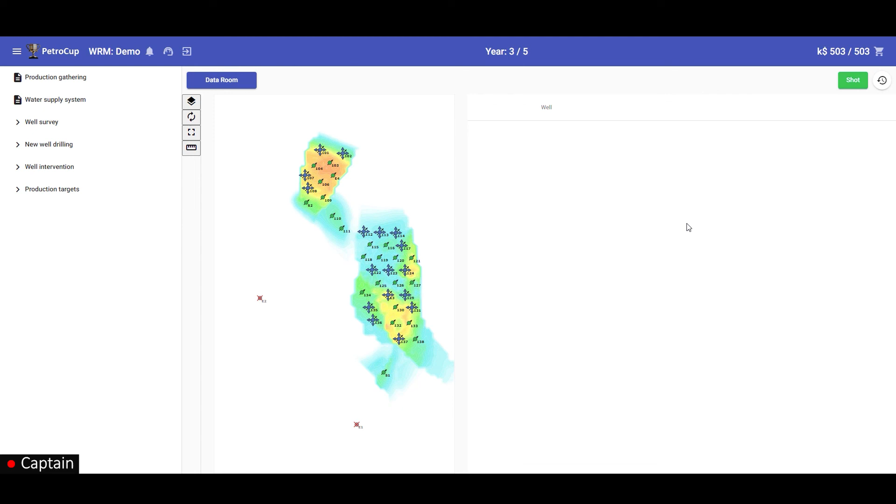We have $503,000 left and 7 activities related to shutting off reservoir B1 in the south and planned activities in the north, E3, E4. I would like to ask the economists to join the discussion. There are 2 scenarios. 1. Finish operating with the southern block, shut off B1, all wells. 2. Some of the activities should be done in the northern block, but if we focus on them, will they provide the same increase? But here it is already clear that the increase will be 2 times less. Does everyone agree? Yes. E4 is converted to injection. There are enough target injection.

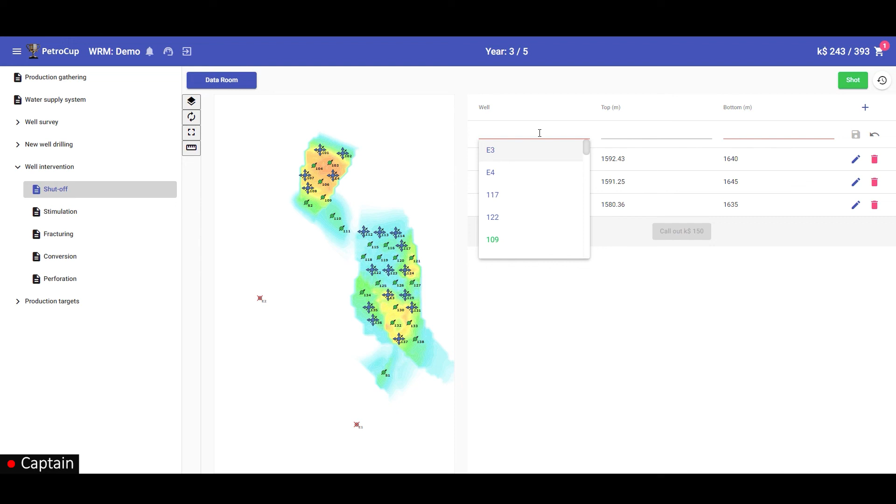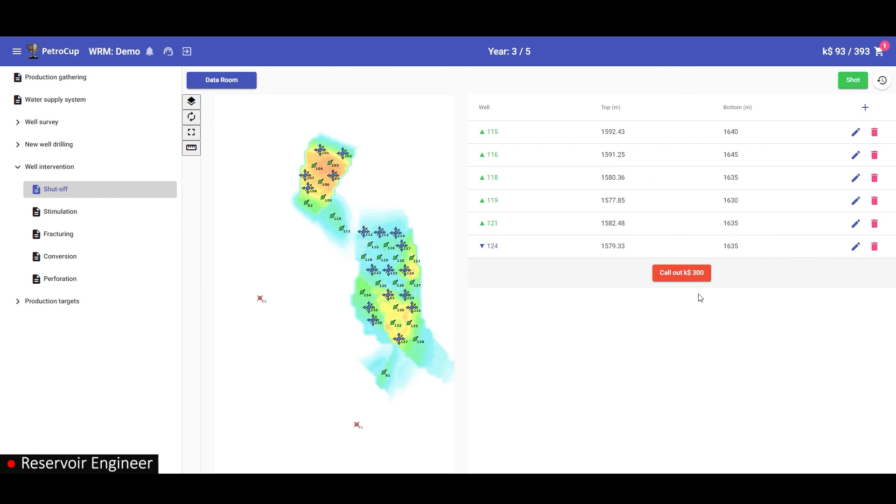Let's work with the producers now. Water shutoffs: 115 from the wellhead to 1640, 116 up to 1645, 118 up to 1635, 119 up to 1630, 121 up to 1635, 124 until 1635. So, do we approve this activity pool? Yes, let's do it. Now, let's concentrate on the reservoir pressure. Yes, this is important when setting the production targets.

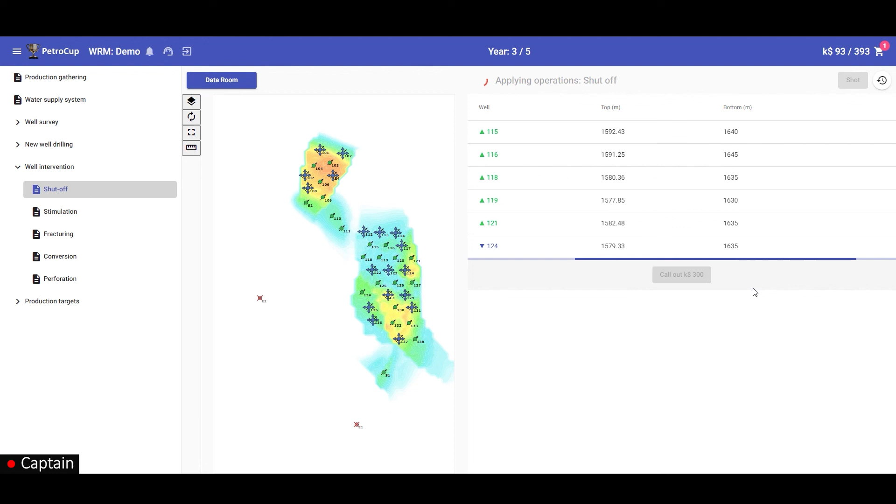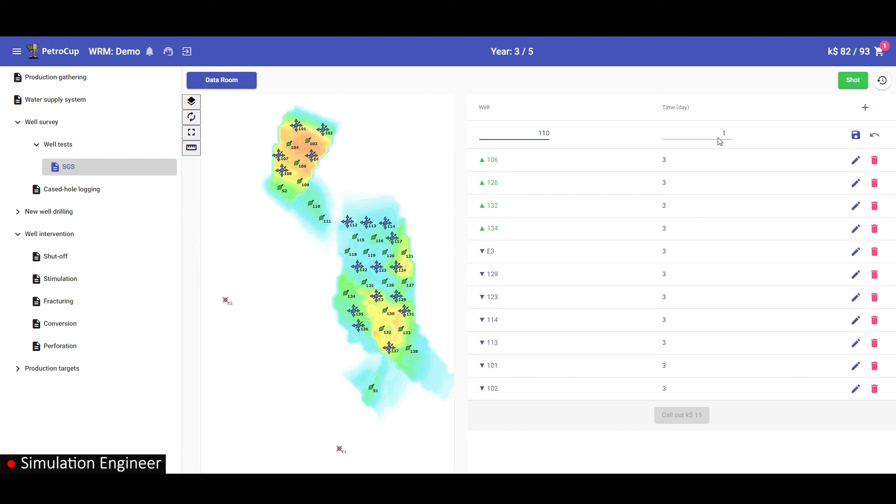Simulation engineer, please tell me which wells are most important. It's necessary to investigate the reservoir pressure at wells 106, 126, 132, 134, E3, 129, 123, 114, 113, 101, 102, 110, 111, 137, and 138. Yes, correct. Let's see the production targets. Please state the well number.

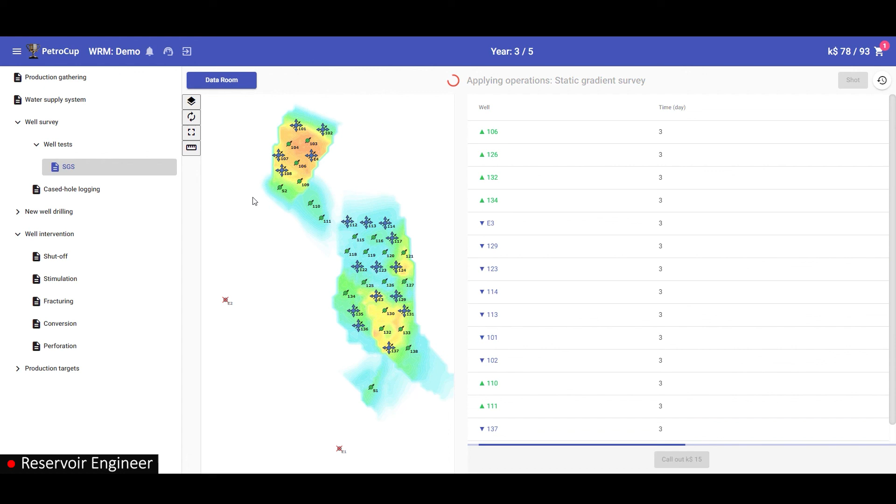Well 101. 200. Well 102. 50. Well 107. 200. Well 108. 400. Well 112. 125. Well 113. 230. Well 114. 90. Well 117. 160. Well 122. 220. Well 123. 190. Well 124. 130. Well 129.

190. Well 131. It is currently 600, but I suggest limiting it to 400. Well 135. 400. Well 136. It is currently 500. Again, let's limit it to 400. Well 137. 140. Well E3. 80. Well E4. 280. We have an excess of 225 cubic meters. I suggest to remove from high rate wells.

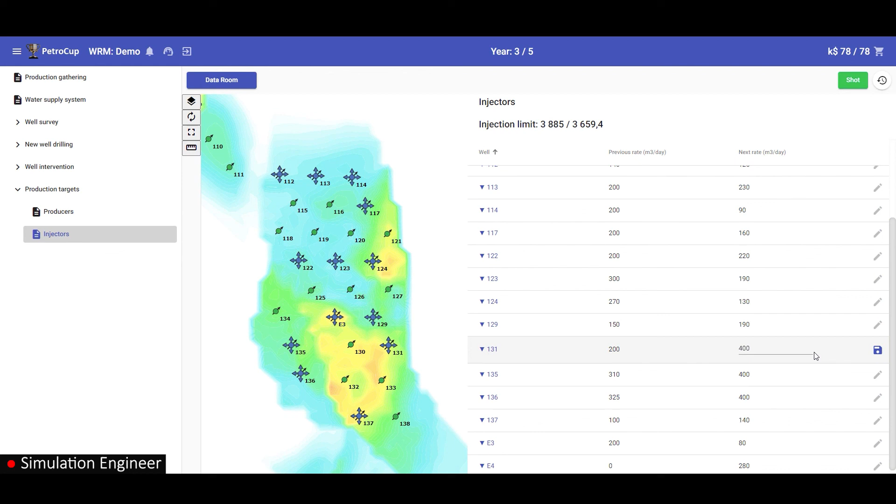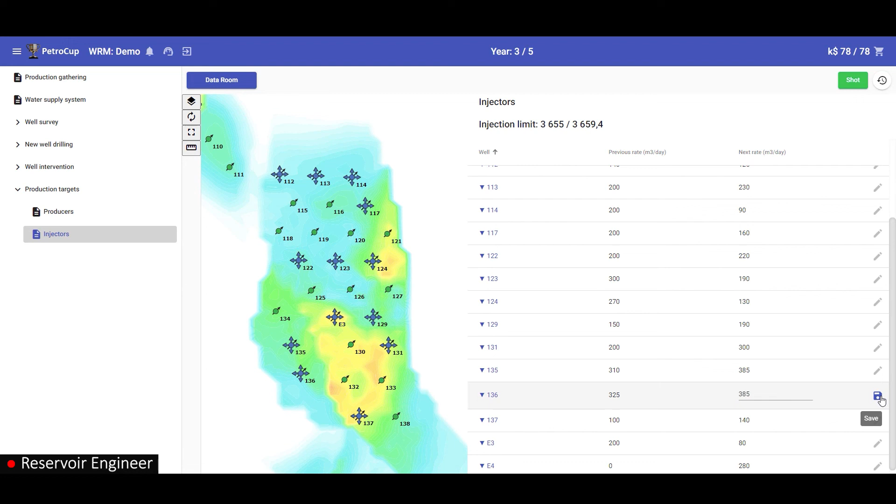Yes, at well 131, let's leave 300. And at well 108, 300. At well 135, it is going to be 385. And at well 136, 385. That's it. Now the producer wells. 103. You can put 20. Well 104. Let's leave 140 for now. Well 106. The calculated value is very small. How much did we have there? 90. Okay, let's leave 90. Well 109.

80. Well 110. 90. Well 111. 120. Well 115. 70. Well 116. 74. Well 118. 60. Well 119. 60. Well 120. 50. Well 121. 65. Well 125. 80. Well 126. And also 80. Let's leave it as it was, 85.

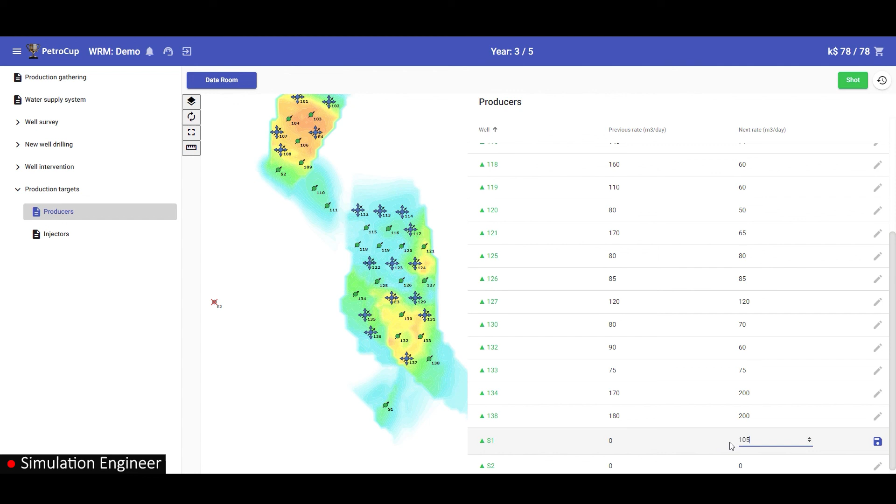Well 127. 120. Well 130. 70. Well 132. 60. Well 133. 75. Well 134. 200. Well 138. 200. Well S1. 105. Well S2. 175. So, we all agree on the wells. Yes, let's place the shot.